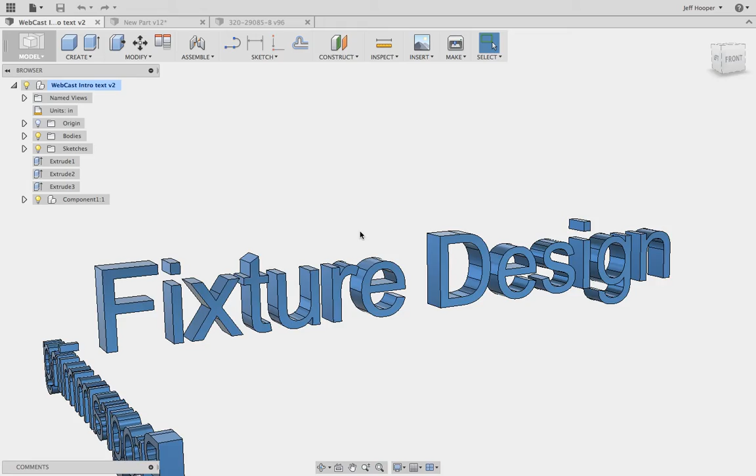Alright, this is section 2 of moving from prototype to production and trying to get some time savings. The first section we went over fixture design. Now we'll go over a couple of strategies I use whenever I'm programming.

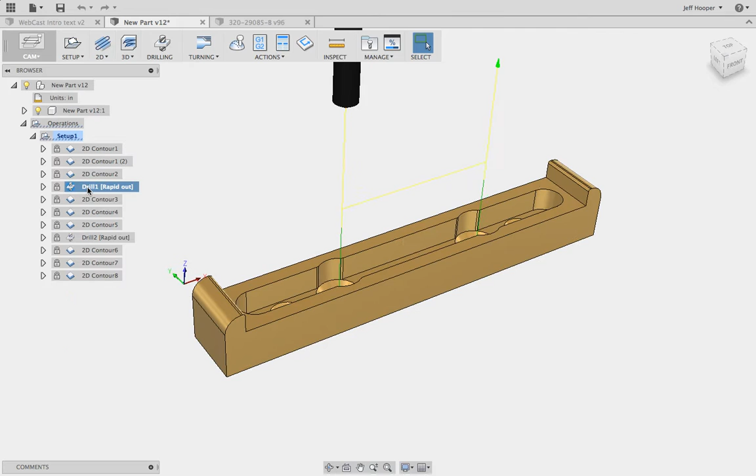We'll go back to that initial part. Remember, all this toolpath here is very concise. It comes down, does exactly what it's supposed to do. There's no wasted motion, but it's still too slow for production, even though it's got some really nice linking moves in here.

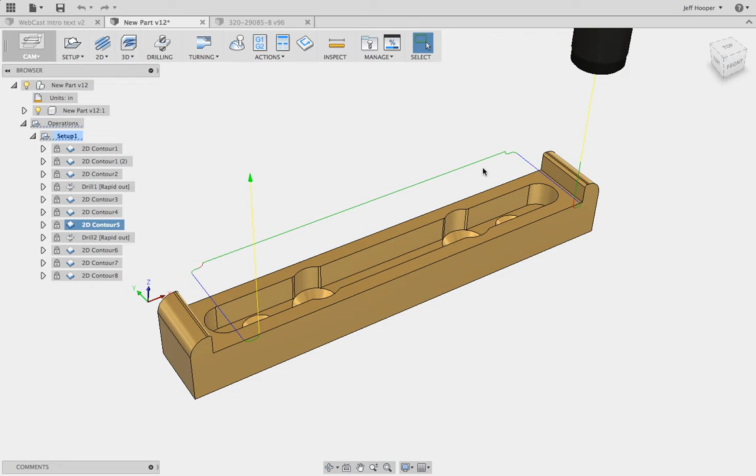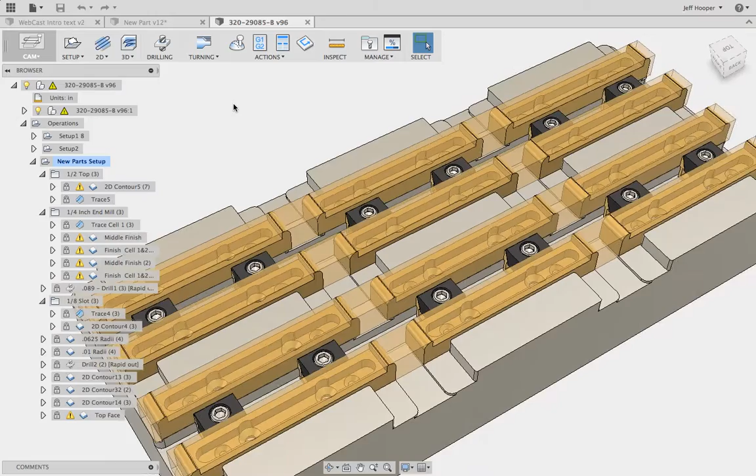It could still be considerably faster if we consider a couple of alternatives. One is, whenever I'm going into a production job, I think: is there a possibility for some custom tooling? That can save you a lot of time. Some of the easiest ones to come by are combination drill countersinks. Even though they're custom, there are shops that specialize in that kind of drill and countersink, and little end mills with chamfers at specific diameters and angles, and that can save you a lot of time.

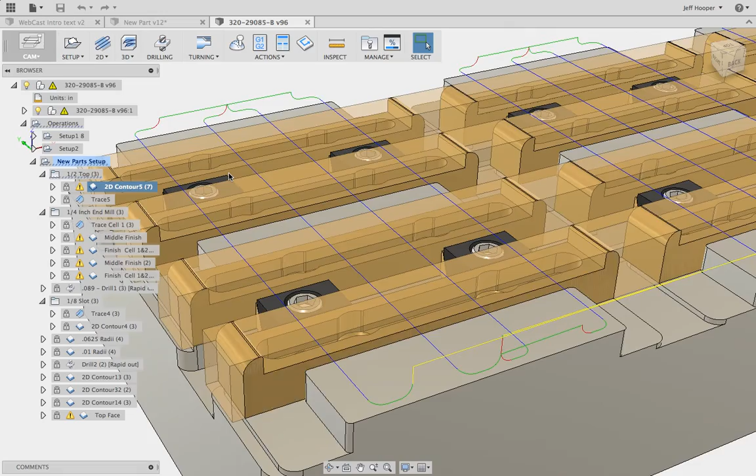Another thing I do to save as much time as possible is consider all my rapid motions. When you hear the word rapid, you think, okay, that's as fast as the machine can go. Well, yes, but it has to get there somehow, right?

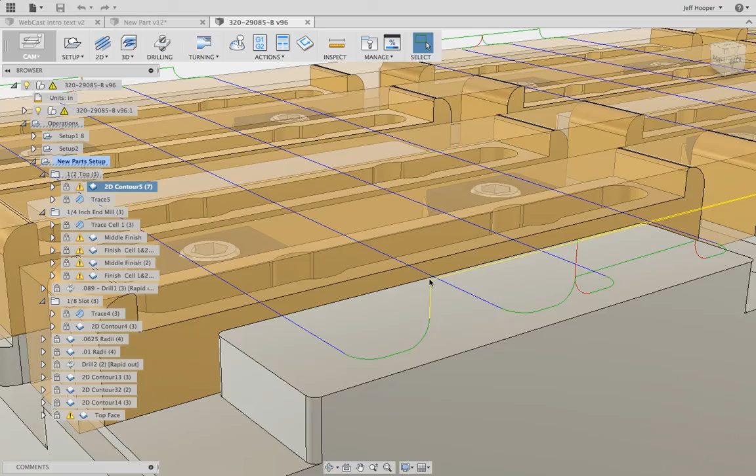Here's a yellow high feed motion linking from contour to contour. If you zoom up on here, that tool, as it's coming across, starts to decelerate, and then comes to a complete stop at that 90 degree. Then it starts to re-accelerate, and then goes right down into cutting. So at some point it comes to a complete stop. How many times does it do that in this part? All these 90-degree motions: bump, stop, stop, stop. Those things can start taking a toll on your time.

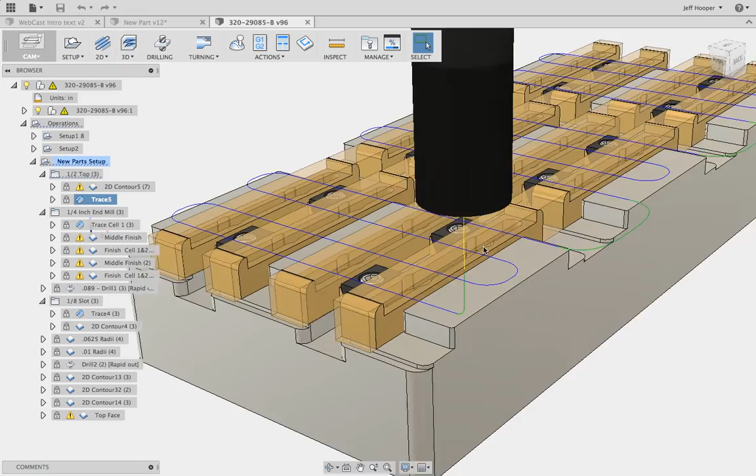So what I do to avoid this is create some of my own linking motions. I draw in my toolpath by hand and make sure there's a radius that leads into every cut and blends every cut. Then, because these are lying on the same Z-plane, the linking motion kind of just automatically gets added in there. I only drew little cells of toolpath.

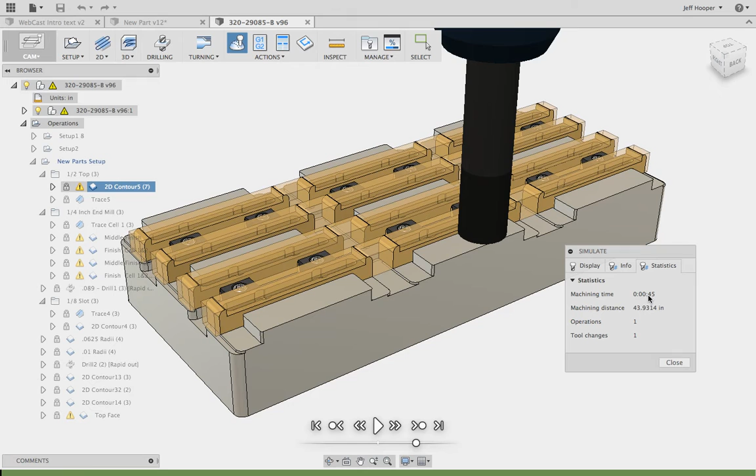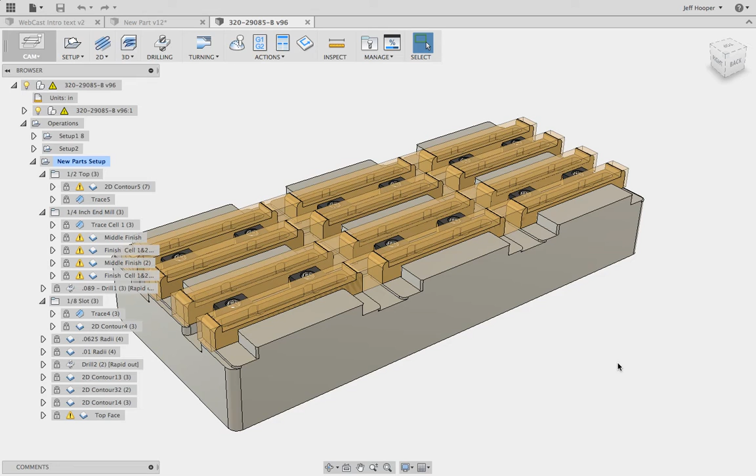If you look at the time difference on this, it might not seem like much, but that's just with some contours, and this is the exact same tool, feeds and speeds, and everything. You saved about 10 seconds, and probably saved more than that, because the software might not calculate that dead stop exactly for every machine. So I use that a lot, especially on this kind of high-run production stuff.

Even on doing contours on the sides, mainly on roughing motions. In this one, if you did a contour, it would cut all the way down, then rapid up, come to a dead stop, rapid all the way back, come down to a dead stop, and so on, keeping cutting in one direction. But there's no need for it to cut in one direction here.

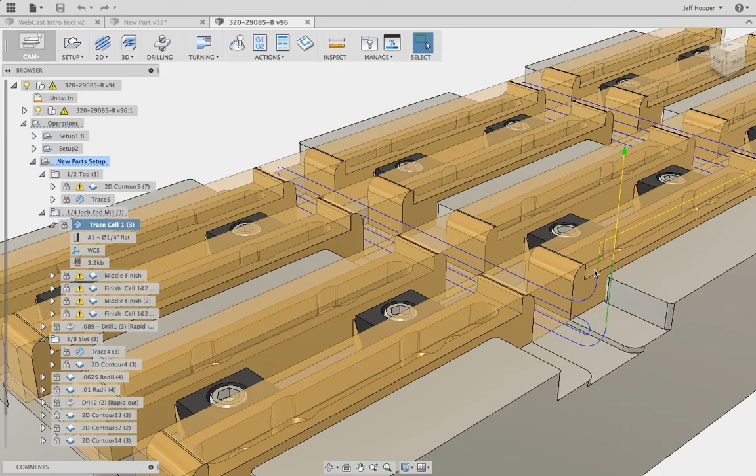You can cut conventional - and when you're doing a slot, it's not really conventional, not really climb cutting anyway. So, boop, boop, boop, boop, boop - he gets in there, does what he's supposed to do, he rapids up. So instead of 1, 2, 3, 4 dead stops, I get 2. I can deal with 2. That saves a considerable amount of time, especially when you're doing 1,000 parts.

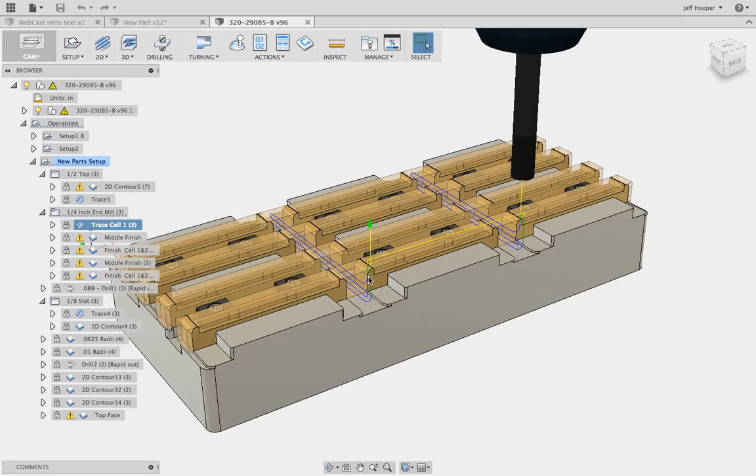Every 10 seconds counts, especially when you're doing roughing like this - your machine might have some difficulty calculating those radiuses, and it might slow down a little bit depending on what kind of machine you have, and if you have high-speed machining enabled.

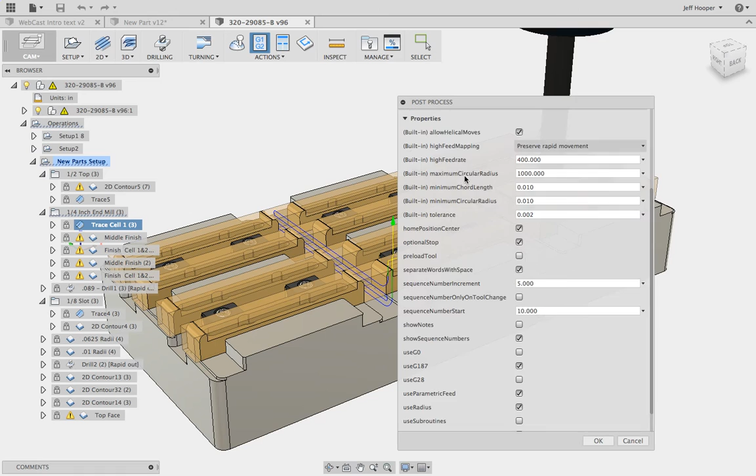But whenever I post out the program for this specific application, I make sure this operation enables this G-code, G187. What that allows me to do is - let me see if I can get it to pull up - I get a P command at the end of this G187, and that P command allows me to set the tolerance of how the machine will calculate that toolpath.

So I can either do it roughly, or I can do it as a finish. Every program is going to be different, and this P-value stands for the quality that the toolpath will be rendered or calculated on the machine, and therefore how fast it's going to run. If it's just a roughing toolpath, the machine should calculate it quickly - you'd put this down to level 3 as a finish, but since this is a roughing operation, I'd actually change that to a P1. Now it's going to calculate that toolpath a lot faster. So I can save that and put it to the machine.

So that's just some time-saving tricks that I use in programming that allow me to save all those seconds by the time I'm done programming. Hope you enjoyed this video. If you have any questions, let me know. Like I said, I like hard problems. Thanks.